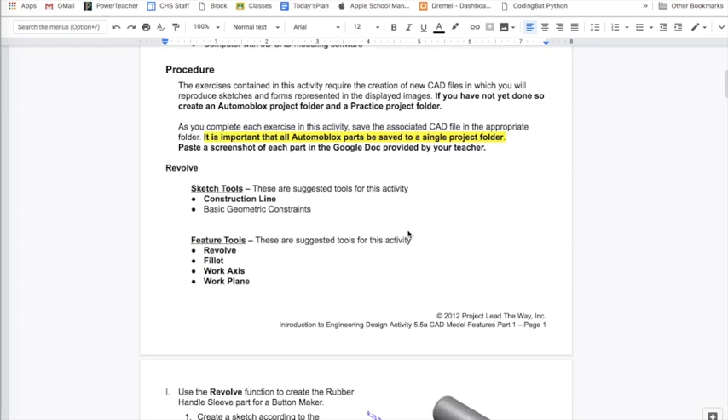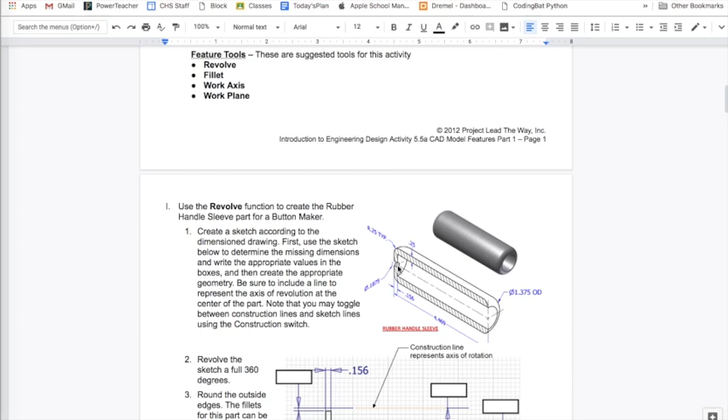So Activity 5.5 is making a number of new parts using some new techniques that we haven't used before. We're going to start out learning how to use revolutions to make some different parts. So this is a rubber handle sleeve for a button maker. You can see it has a little hole in the end and then a larger diameter in this part.

And so what we're going to do is create a new part, and then we're going to draw a profile for one side of this kind of L shape, and then we're going to revolve it around the center to make the solid. And then finally, we'll add the quarter-inch round on the outside.

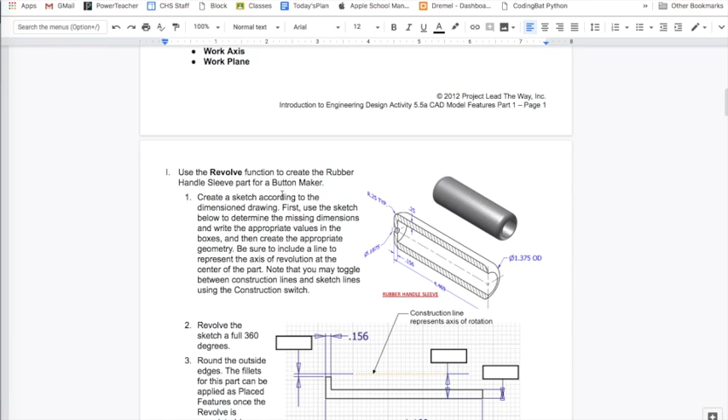So the first thing we want to do is create a new part in Fusion, and I'm going to save that. Make sure it saves in my practice file here, and I'm going to call it, like it says at the bottom, rubber handle sleeve. And so I'll save that and I'll create a sketch. And it doesn't matter again which of these that you sketch on.

But the first thing that I want to do is remember I'm going to use one of the axes or some line I need to revolve around. And so I'm going to want to make sure that I have that set the right distance above it. One way would be to start with that revolution being right on the axes. Another way would be just to sketch this and put that line up above. So I think I'm going to try that this time.

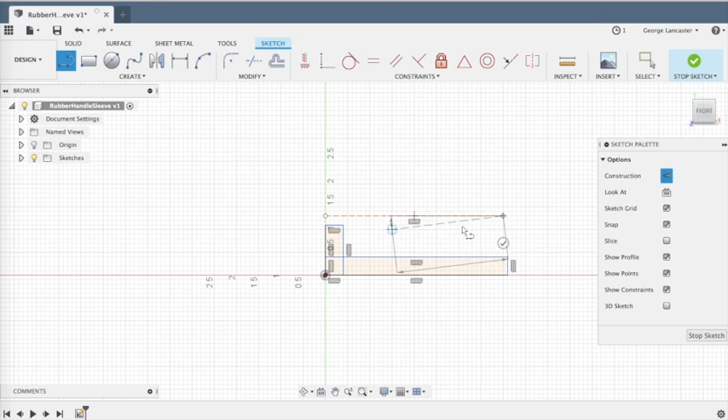Basically, it's an L shape, so I'm going to draw two rectangles, kind of like that. And then I'm going to draw another line up here. And I like to turn on construction line because this is not going to be an actual object line, so I'm just going to use the construction line tool here. And so there's the shape that I need for my L, just drawing two rectangles. Now I need to add some dimensions.

So the first dimension I can see is that this represents the opening at the end. This says it's a diameter of 0.1875. So to find the radius, I needed to divide that by 2. So the way I'm going to do that is dimension, click the center, and then just type in 0.1875 and then /2. It'll do the math for me. And this is going to be the opening at the end.

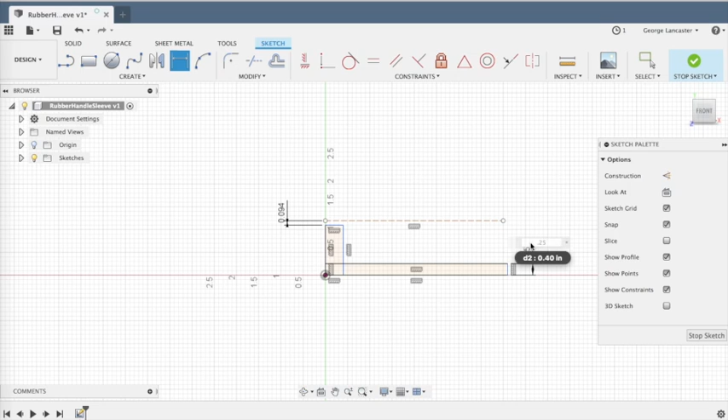Next, I can see that there's a 0.25 for the thickness of the handle part. So the distance between these two is going to be 0.25. On this end, it's 0.156. So here to here, 0.156. And then I just have a couple things left.

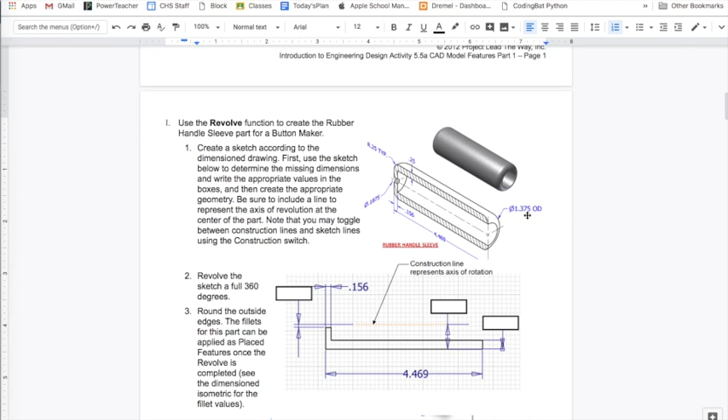The overall outside diameter of the entire handle is 1.375. That's an outer diameter, so I'm going to need to divide that by 2 to get the radius. So 1.375 from the center. 1.375, divide that by 2. And notice that everything is turned black here except for the end here. The entire handle is 4.469.

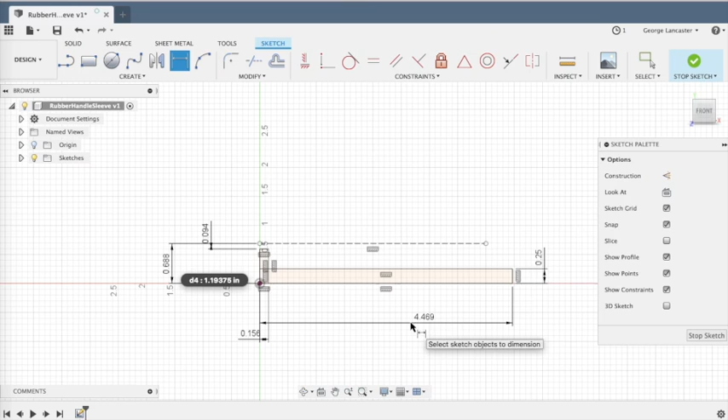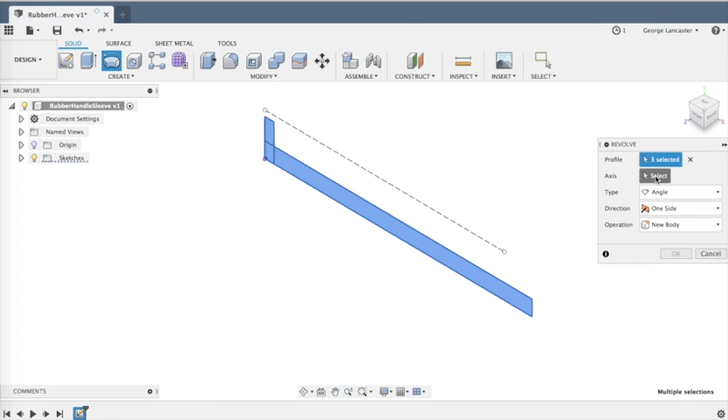And so now everything's black, everything's fully constrained. I can stop my sketch. And this time I'm going to choose revolve, which is something that we haven't done a whole lot of. So if I revolve, it wants to know two things. It wants the profile, and the profile is going to be the entire L section. Then it wants to know the axis of rotation, which is my center right here. And so if I click OK, you can see I have my sleeve.

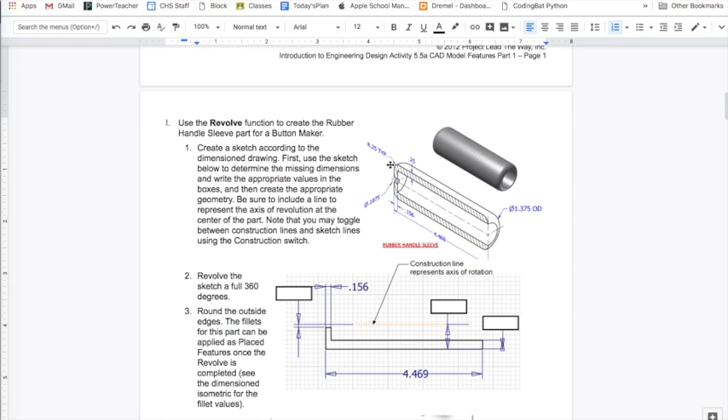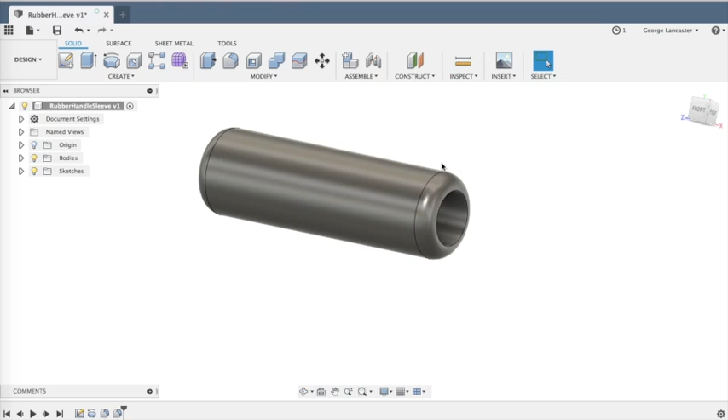It does have the hole inside here. You can look right down the center and see that hole. And the last step is to put the 1/4 inch round on both ends of the handle. So right here in modify, there's our fillet tool. You can click right there, 0.25. You can click on the other end and, oops, I missed that. This end, 0.25. And there we go. We have the handle all created. And so I'll save it again.